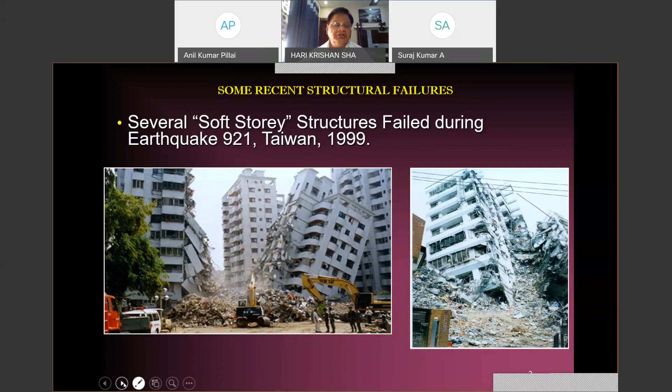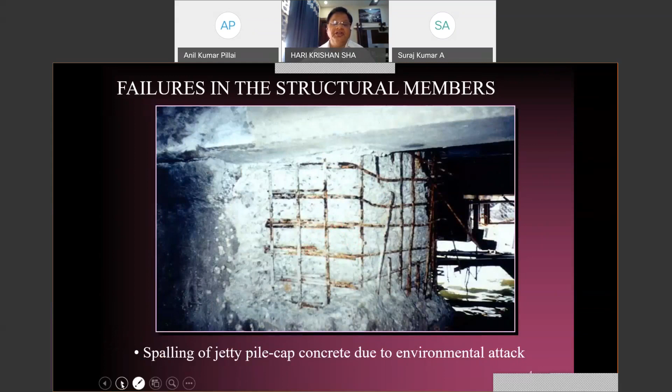You can also see the failure of structural members in this picture, the spalling of jetty pile cap concrete due to environmental effects. Our concrete is prone to environmental effects also, and you can see the yellowish material, which is basically considered as the blood of concrete, which has come out. The concrete cover failed, and you can see that the reinforcement is clearly visible. This was basically a bridge.

You can see that our concrete structures are prone to environmental effects also. On the left-hand side, you can see that the reinforcement is badly corroded. On the right-hand side also, you will find a pier that was corroded, where there is peeling of concrete, and the reinforcement is clearly visible, badly corroded.

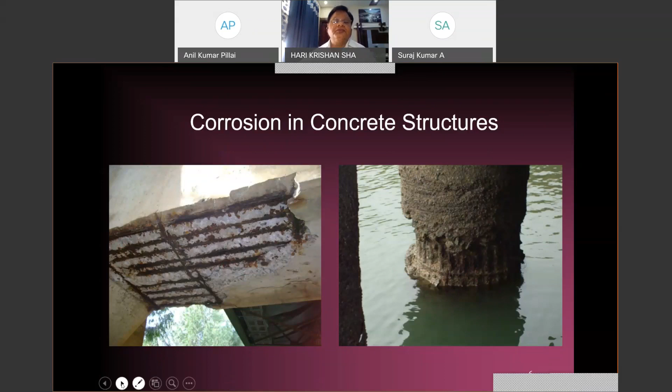Likewise, if you look at the distressed concrete structures which failed during the last 25 or 30 years, you will find that concrete has been badly affected because of one reason or another.

This has basically necessitated the retrofitting or repair of concrete structures. Common conventional techniques for strengthening reinforced concrete elements, like concrete jacketing, shotcreting, guniting, or steel plate bonding, are basically conventional methods which are quite cumbersome, messy, and time consuming. They are also labor intensive and require a lot of skilled work, and now there is a problem of skilled labor too.

In recent years, during the last 25 to 30 years, the construction industry has seen increased demand in retrofitting and strengthening of existing structures because of poor workmanship, poor design, and poor use of these structures. Poor maintenance of the structure is also responsible for retrofitting and strengthening from time to time. This may be attributed to various reasons, which are well known, like environmental degradation, design inadequacies, poor construction practices, lack of regular maintenance, increase in loads, unexpected loading conditions, and so on.

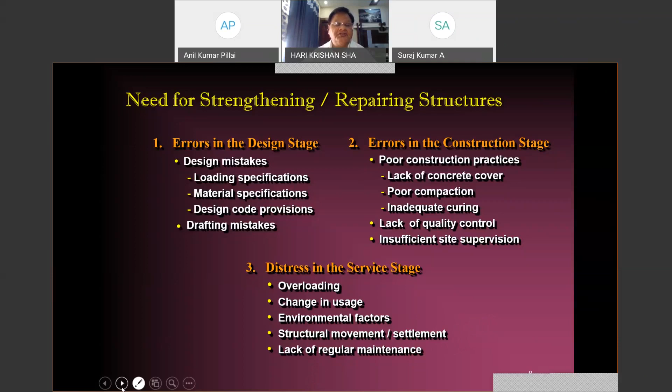Now, with these three parameters which necessitate the strengthening and repairing of structures, let us come to the retrofitting of structures using conventional methods or advanced methods.

As far as the basic objectives of repair or retrofitting of structures are concerned, the basic objective of any technology, especially technology used to repair or retrofit a structure, is to restore a defective structure back to its original state. That is the sole motto.

Further, many times it is our objective to upgrade an existing structure, because many times when we change the use of the structure, it necessitates upgradation of the structure, for which strengthening is required, and to improve or strengthen the existing structural members.

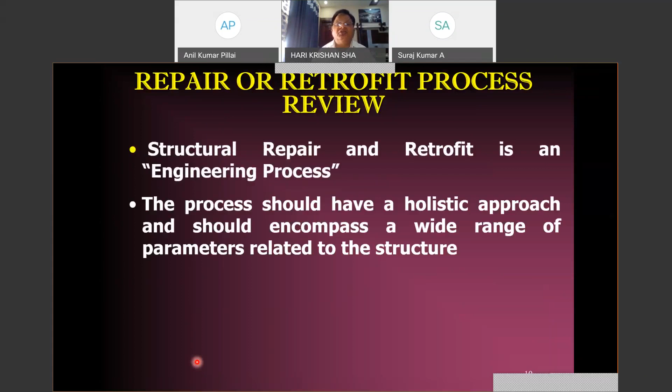Friends, as far as the repair or retrofitting process is concerned, if you look at it, you will find that structural repair and retrofit is an engineering process. It is not a layman process, it is basically an engineering process. I can say that retrofitting is basically an art as well as a science.

The combination of these two will lead to the engineering process methodology, and the process should have a holistic approach and should encompass a wide range of parameters related to the structure. We should see the problem holistically, in totality, and the repair process should appropriately address not only the symptoms but also the causes of the distress.

This is very important, that whenever we go for any kind of technology, we should see the problem in totality. What are the symptoms in the structure? What are the causes of the distress in the structure, and how these distressed structures can be retrofitted?

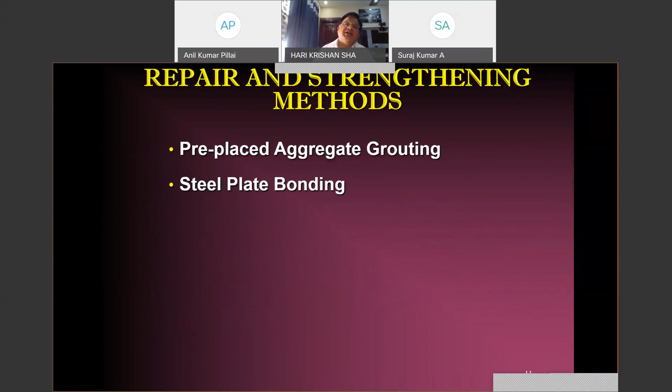Now, as far as the methods are concerned, the conventional methods for the retrofitting of structures, all of us are well conversant with. These are pre-placed aggregate grouting, steel plate bonding, sprayed concrete, crack injection technique, and the latest or recent technology in this area is composite wrapping. As far as pre-placed aggregate grouting is concerned, it is basically nothing but the jacketing of the distressed structure.

The steel plate bonding technology is known to us, and out of these methods, which method is to be adopted will depend on the factors affecting the structure and the degree of severity. One of the most important parameters for the selection of the method is the structural demand or the degree of deterioration.

Now, this will basically decide the method to be adopted, whether we can go for the conventional method or some advanced method. So what is the structural demand? What is the damage in the structure? So that we can retrofit the structure to get back to its original state, or we can even enhance the structural strength for additional loads and stresses which may come because of change of use of the building.

The availability of the budget is equally important, because when we go for the retrofitting of structures, how much budget is allocated for this purpose, and based on that only we can decide that a particular method is suitable.

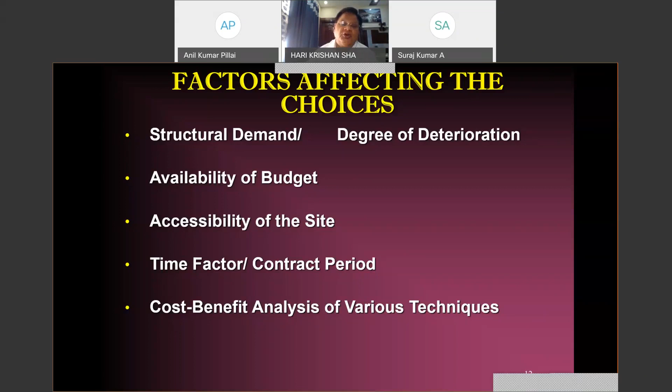As far as traditional methods are concerned, in jacketing we are increasing the size of the member by putting additional concrete and additional steel reinforcement. Now there are many problems associated with this method, like the method is bulky and setup requiring formwork. The method is time consuming and labor intensive.

Nowadays it is very difficult to get skilled labor. The method is fairly destructive because the structure which has already been distressed or damaged, we are basically disturbing that specimen by removing the damaged concrete and the damaged reinforcement. So we are further destructing the structure which has already distressed.

Then improper bond between new and existing concrete is also one of the problems, because the concrete which was laid 25 or 50 years back may not be compatible with the new concrete. Many times the concrete which has already hardened is not accepting the new concrete. So we have to use appropriate bonding material so that there will be a bond between the existing and new concrete. This is also one of the drawbacks of this method.

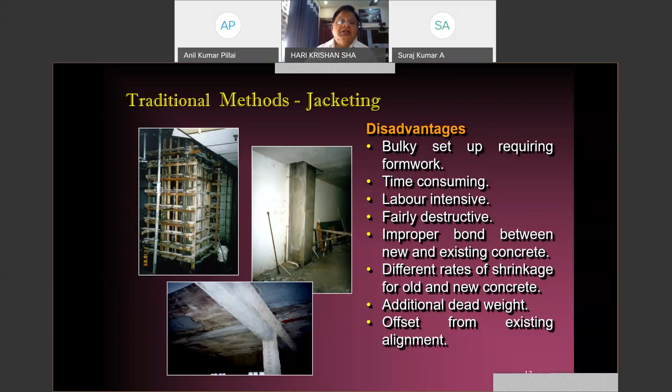As far as steel plate bonding is concerned, the steel plate is basically fixed by providing additional holes in the distressed structure, and we are again damaging or destructing the structure which is already distressed. So these are some of the problems associated with the steel plate bonding technology.

The method requires a bulky setup because the steel plates are very heavy. The method is labor intensive. The steel plates need to be tailor-made, with perfect leveling, and when you put the steel plate over the structure there should be proper contact between the steel plate and the existing concrete. Then it is hard to lift the steel plates and align them with the structure.

Drilling and bolting causes distress in the existing structure. The welding of the steel plates with the existing structure is also a new kind of problem. And there is a problem of quality assurance, because many times such treatment is given by unqualified engineers or by a contractor who is not qualified or competent in retrofitting technology.

With sprayed concrete, again we have some problems, and I'm not going into the details since they are more or less the same. The method is messy, and you will find uneven surface finishing at a later stage. Most importantly, there will be an increase in member dimensions. Say the concrete column was basically 300 mm by 450 mm; after the sprayed concrete, you will find the member has increased by about 50 mm on both sides. That is the problem—it means you are putting additional dead loads, which is again a problem.

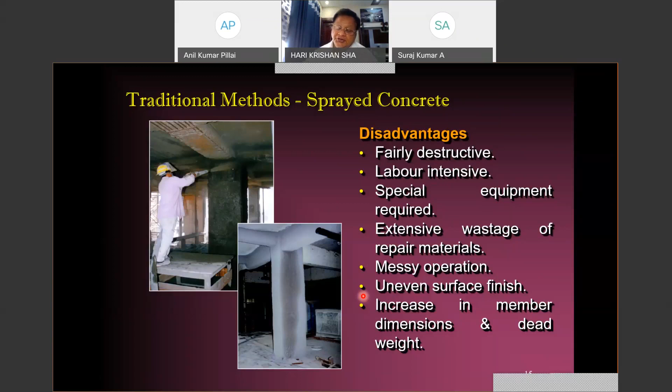Now, as far as the crack injection technology is concerned, this method I would not like to recommend. This is simply a cosmetic treatment, in the sense that cracks in concrete are sealed or injected with epoxy resin, cement grout, or other suitable materials to prevent ingress of atmospheric gases or to restore structural integrity of the element by bonding only. So it cannot be used for repair, and it has nothing to do with the enhancement of structural strength.

So it does not enhance the element's original load carrying capacity. I can say this crack injection technique is simply a cosmetic technique, and it will not significantly increase the load carrying capacity of the distressed structure.

With these conventional methods having such problems, some new or advanced retrofitting methods came into existence. One of the technologies was steel fiber reinforced concrete, developed in the early 70s. As a structural engineer you know it is nothing but concrete prepared by mixing small discrete, small size wires in concrete, and the maximum amount of these steel fibers which can be added in SFRC is 2%. At 2%, there will not be a significant increase in load carrying capacity, whether in compression, tension, flexure, or shear. So this kind of concrete, developed for conventional structures as well as for repair and retrofitting of distressed structures, did not work for a long time because the strength enhancement was not significant.

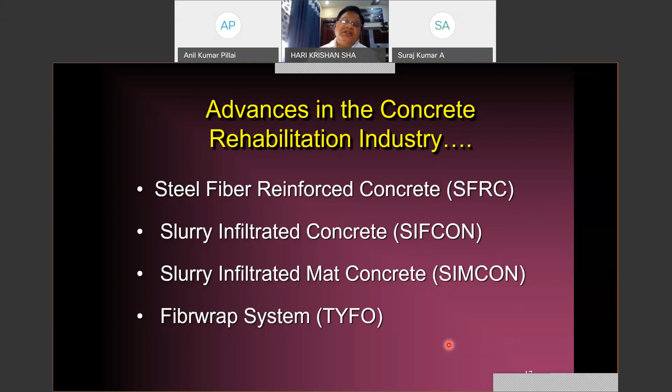Then came into existence the fiber wrapping system. And this fiber wrapping system, using fiber reinforced polymer, is the current basis for the retrofitting of distressed structures.

As far as composite wrapping is concerned, friends, the elements requiring capacity enhancement are jacketed or wrapped with fiber reinforced polymer. So by virtue of concrete confinement, or by acting as additional reinforcement, the load carrying capacity is enhanced. It is a very simple method, wherein the distressed structure is wrapped from all around, and by virtue of the concrete confinement, there will be confinement of concrete, and because of this confinement, the load carrying capacity will be enhanced.

The capacity enhancement depends on the orientation of the fiber and the thickness of the composite material. So the orientation of the fibers and the thickness of the composite material are very important parameters in this technology, so that the strength enhancement can be worked out depending on the structural demand of the element.

Now the question came, why should we go for FRP composites? As far as FRP composites are concerned, they have almost all the advantages of steel plates for plate bonding. The method is speedy and can be applied with minimum increase in structural weight and size. In this method you will find a high strength to weight ratio. Fiber wrapping system is very thin, and you will find significant increase in strength, with high strength to weight ratio when this technology is applied.

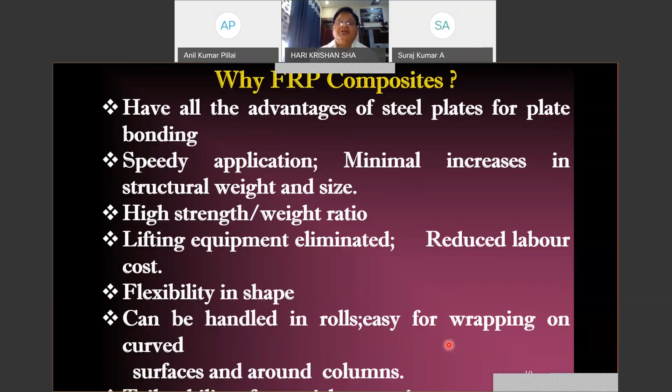Lifting equipment is not required, and the method is also not labor intensive, because only a few laborers are required to wrap the distressed structure using this material. There is flexibility in shape, so any kind of structure can be retrofitted by FRP. The method can be handled in rolls, easy for wrapping on curved surfaces. With these advantages, FRP composites are found better in comparison to the conventional method.

There are again various advantages, as I talked about. The method is fast, intuitive, and no heavy equipment is required. It will mitigate several disadvantages posed by concrete jacketing or steel plate bonding, and no additional dead load is put over the distressed structure.

There are some limitations. Nowadays, there is only one limitation, that the method is a little bit costly. But if you avoid this parameter, because nowadays the thing is costly, the technology has already been developed, and it is basically a waste material from the aerospace industry. So presently, the method is also not costly. And if you see the cost versus time parameter, the technology is very much economical with respect to time. As far as the fiber wrapping system is concerned, the method was developed

around the 80s by a company called Fyfe Company in USA, and it is basically an innovative method to strengthen structures. The materials were basically derived from the aerospace industry, and as I was talking about, this is basically a waste product of the aerospace industry. We are using high-strength glass hybrid systems consisting of E-glass fibers, Kevlar fibers, carbon fibers, and these fibers are basically embedded in epoxy matrix onto the structure. And nowadays, this method is accepted worldwide.

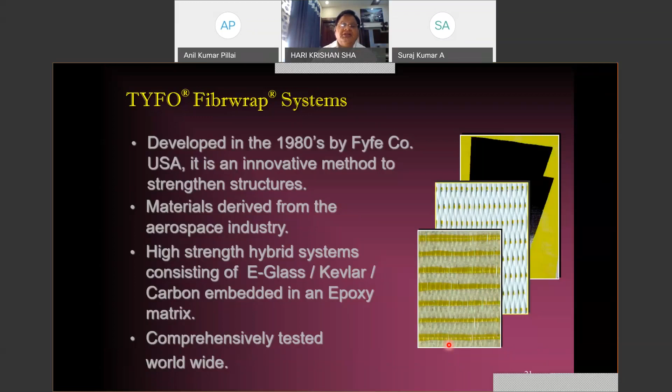As far as the history of this FRP system is concerned, carbon fiber reinforced polymers were first used for the manufacturing of aeroplanes, and the Boeing 787 plane was delivered to All Nippon Airways on 25th of September 2011 using this material. The first commercial flight started for this aeroplane on 26th of October 2011. Each plane used 32 tons of carbon fiber reinforced polymers, including 23 tons of carbon fiber.

So you can say that a huge amount of this material was used in the manufacturing of the Boeing 787 planes. The CFRP composites constitute 50% of the weight of the plane and 80% of the volume of the material. The plane consumed 20% less fuel due to the use of carbon fiber reinforced polymer. So you can see the economy in fuel consumption because of the less dead load of the plane.

As far as carbon fiber reinforced concrete structures are concerned, this material was also used for high-speed intercity buses. You can find the frame of the high-speed intercity bus, which was basically made up of the FRP, the carbon fiber reinforced polymers.

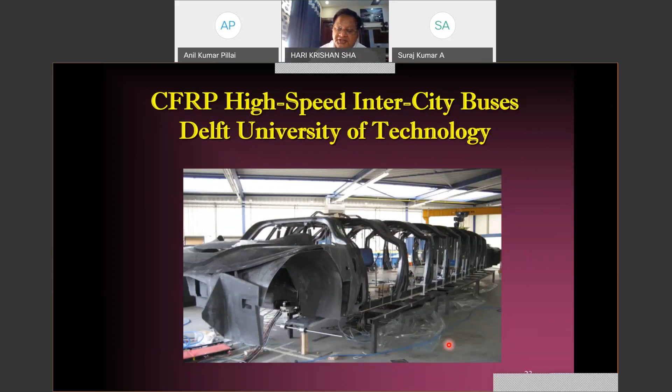This is basically one of the bridges, the Storchen Bridge, which was constructed in Switzerland, and this bridge was built around 1996. There were two spans, one span having a length of 63 meters, the other one 61 meters.

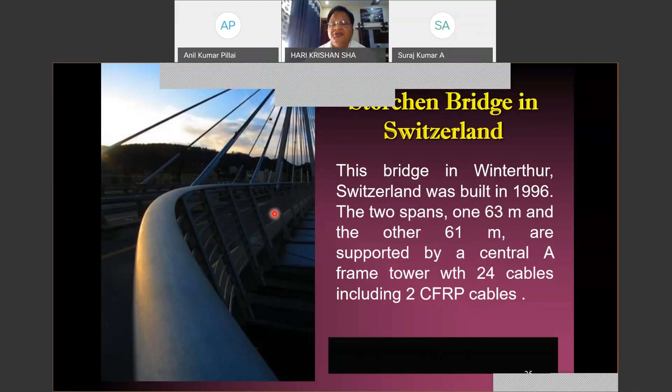They are supported by a central A-frame tower. You can see the tower. This is basically an A-frame tower over which this bridge was supported with 24 cables. And out of these 24 cables, two carbon fiber reinforced cables were also used in this bridge.

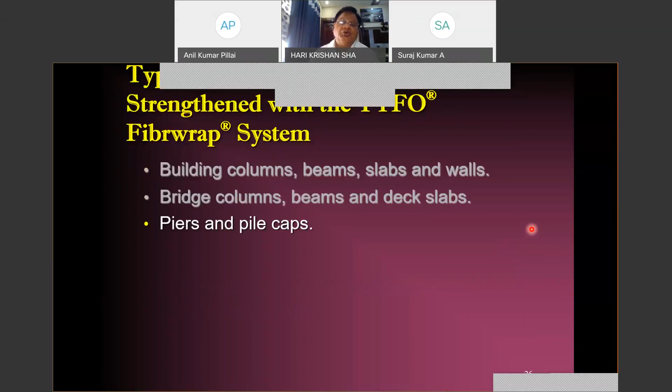So as far as this material is concerned, if you see the application of this material, it can be used for retrofitting or strengthening of building columns, beams, slabs, and walls. It can be used for the construction of slabs also, in piers, the longitudinal and cross girders in case of bridges, in pile caps, in tunnels, and in large and small diameter piping also.

For steel pipes also, this method can be used for strengthening purposes. And for wooden and concrete piles, this method can also be used advantageously. In case of marine structures, you will find in some of the slides that this material was also used for jetties and similar works to strengthen these structures.

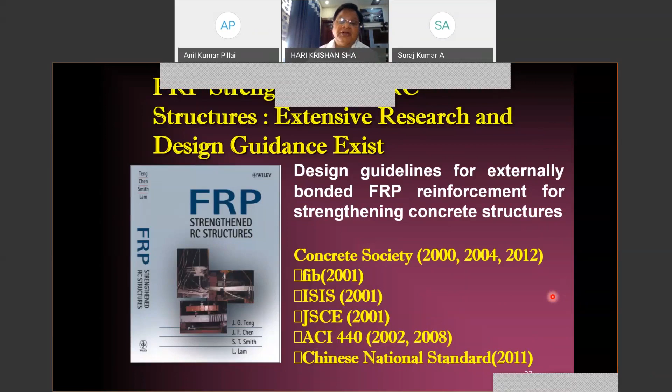As far as research and development in the area of fiber reinforcement is concerned, there are some books available in the market, and you will find a book on fiber reinforced polymer strengthened reinforced concrete structures. This book basically gives design guidelines for externally bonded FRP reinforcement for strengthening concrete structures. In addition to this book, you will find a number of research papers and the ACI code 440, which was developed in 2002 and reaffirmed in 2008. This code is widely used for the design of FRP structures.

As far as the advantages of this method are concerned, as I told you, the method is non-destructive and easy to install, because in this case, you are not destructing the structure which has already been distressed. The material is very light and will be of only a few kg in weight, and will not require heavy or special equipment. It can be used in space-constrained areas because not much space is required, can incorporate different finishing coats, and can be used in underwater structures also. So in case of piers, in case of foundations which are constructed underwater, this material can be used advantageously.

As far as the performance characteristics of this material are concerned, when we design our structure, there are two considerations: one is the strength consideration, the other is the serviceability criteria. As far as strength is concerned, in limit state design you have the limit state of collapse.

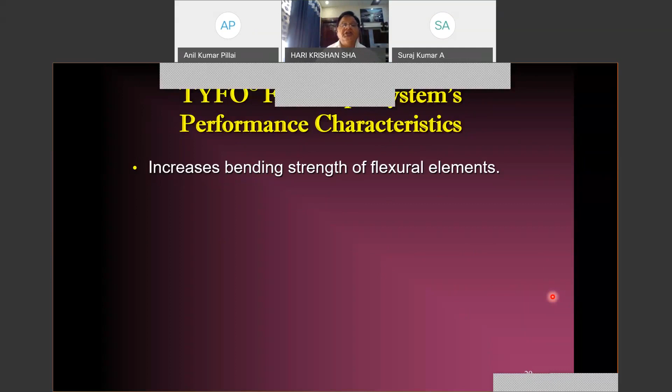And for serviceability, you have the limit state of serviceability. So following the limit state method, using this material you can enhance the flexural strength of members, increase the shear strength of columns and walls, and increase the vertical load carrying capacity of compression members. The material is also used to increase the ductility of the structure, which is of paramount importance in earthquake resistant structures, and under cyclic loading any increase in ductility is an added advantage.

The material has very high tensile strength, and it does not corrode, which helps contain further corrosion of a distressed structure. Because it is waterproof, it will not permit the ingress or penetration of water into the structure, further containing corrosion.

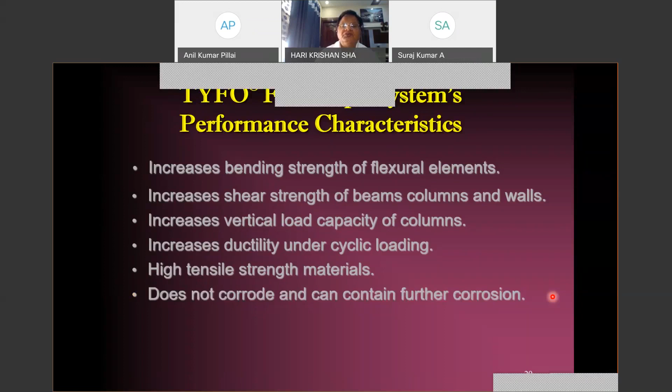As far as application of this material is concerned, nowadays you will find FRP bars which have replaced conventional steel bars.

You will find this material used for compression members also, and it can be used as formwork. We can leave this formwork as such, and the material will basically replace conventional reinforcement.

The material can also be used as a truss member in truss structures - for compression members, tension members, diagonal members, vertical members, and so on.

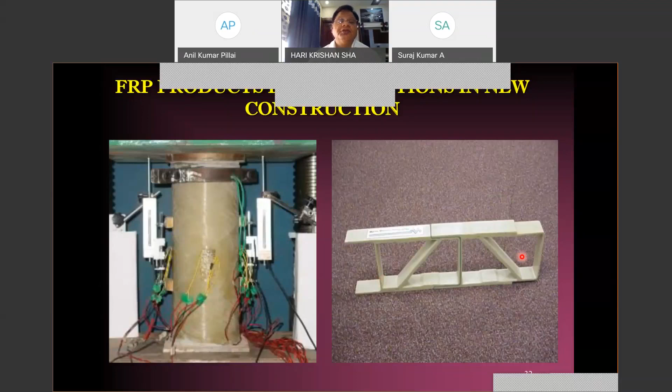As far as application is concerned, this is very interesting - the structure you want to retrofit must first be prepared. As far as surface preparation is concerned, we remove the plaster and clean the surface, patch up surface irregularities, and round off all corners to about 20 millimeters.

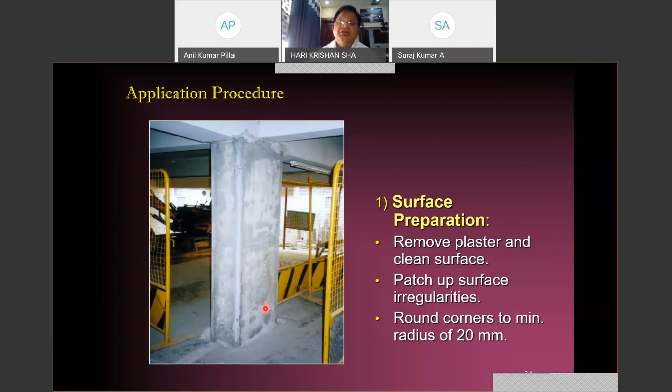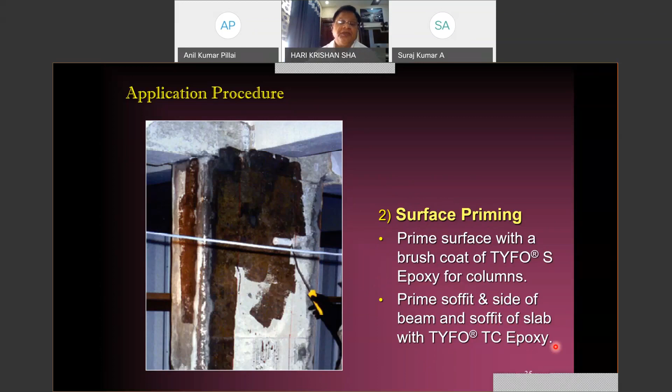These corners are rounded so that when you apply the FRP sheet all over the column, there will not be ingress of atmospheric gases from the corners. Once the surface is prepared, it is painted with a surface priming coating - a brush coat of epoxy - priming the soffits and sides of the beam and slab also with appropriate epoxy.

Once the epoxy is applied and the surface primed, the fiber sheet is wrapped all around the member, like a bandage. The fiber reinforced polymer sheet is available in rolls - you simply unroll the sheet, put a layer of epoxy, and wrap it over the distressed structure, just like a bandage.

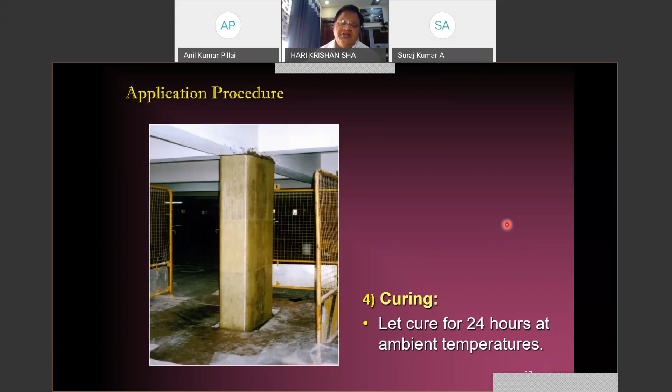Once the distressed structure is wrapped, you leave it for about 24 hours at ambient temperature for curing - no special curing is done. After 24 hours, you can apply any kind of finishing coat and the structure is ready. Now you can see there is a white finishing coat, and the structure is ready for use, for different types of structural components like beams, columns, slabs, and foundations.

In case of retaining walls also, this material was advantageously used to enhance structural strength. Now you can see the application of this material for retrofitting beams, where it was applied on the bottom as well as on the two sides of the beam.

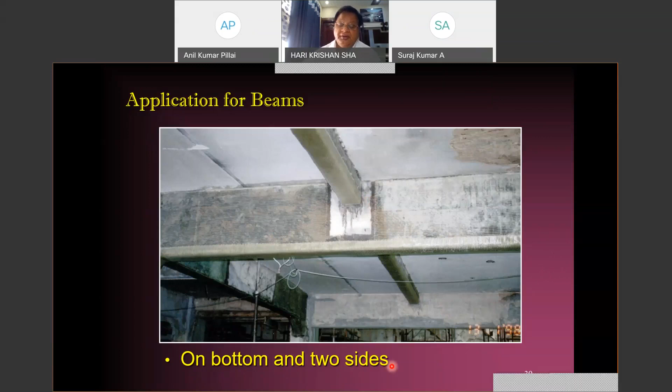You can apply this material over the walls, just like a wallpaper. You can put a sheet of the material over the wall and fix it with an appropriate epoxy, so it will look just like wallpaper.

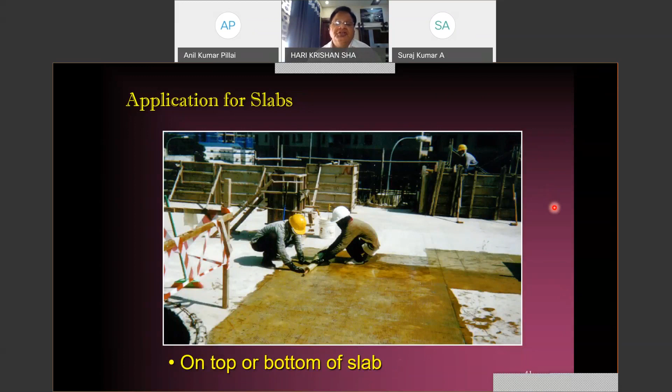You can apply this material for retrofitting of slabs, either from the top or from the bottom, depending on the type of cracks developed in the structure. You can use this material either at the top or bottom of the slab.

The material can be used advantageously for the retrofitting of columns, silos, and chimneys. For a column, you can simply put your FRP sheet all around it, just like a bandage.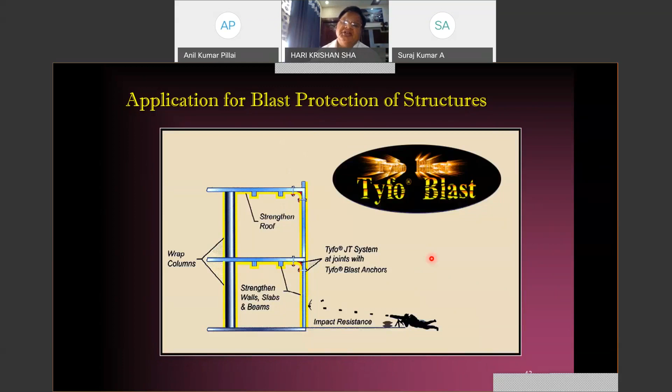This material is basically blast resistant, so it can be used advantageously in bunkers and silos, which are normally used by our defense people. This material can withstand a blast of significant intensity.

As far as the code of practice for the material is concerned, we do not have any standard code. There are some guidelines from ACI Committee 440 and ICBO. AC 125 is also available. ICBO is the International Conference of Building Officials, with specifications for concrete and unreinforced masonry strengthening using fiber reinforced polymer materials. Using this ICBO AC 125 code, we can design FRP structures for the loads and stresses that will come over the distressed structure in future.

ACI Committee 440 provides guidelines for the design and construction of externally bonded FRP systems for strengthening concrete structures. It states that FRP systems must be developed through material characterization and structural testing, as untested combinations of fibers and resins could yield an unexpected range of properties as well as potential material incompatibility.

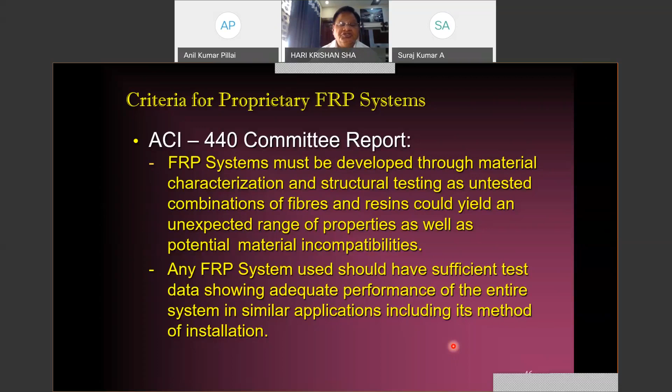These are some of the physical properties of the composites which are required to be tested before applying this material onto the structure, like ultimate tensile strength, elongation, tensile modulus, coefficient of thermal expansion, etc. All these properties are tested as per ASTM standards.

As far as the durability aspect is concerned, these are some of the tests—water resistance test, salt water resistance test, alkali resistance, and dry heat resistance test—which are conducted to ensure the durability requirement of this material. These tests are also conducted as per ASTM standards to know the applicability of the material.

As far as ICBO requirements are concerned, system tests are to be conducted when this material is used for columns, beams, slabs, or infill walls. These tests are conducted in compression, shear, flexure, and some tests are also required for ductility. When this material is used for beams, flexural and shear tests are obviously required.

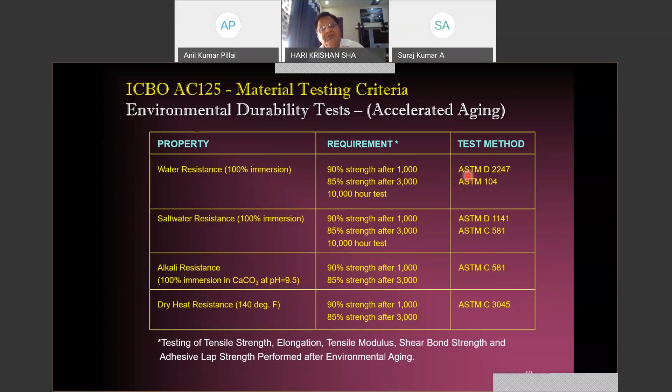In case of slabs, which are basically flexural members, flexural test will be sufficient. In case of walls, out-of-plane flexural and in-plane shear tests are required. And when the material is used for pipes, the pressure test is required to be conducted.

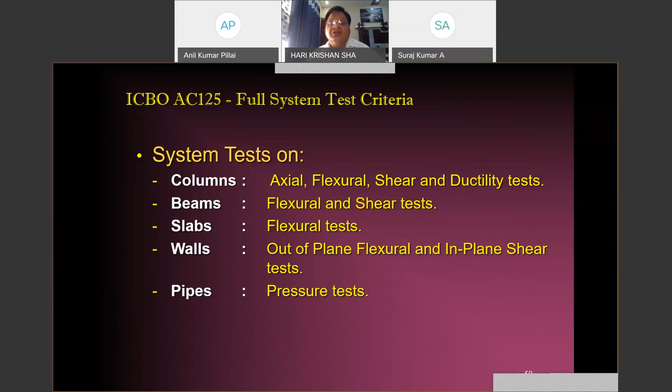This material was widely tested at the National University of Singapore. Columns, beams, and slab elements were extracted from an existing structure, and these elements were strengthened with Tyfo and tested to failure.

The actual failure loads were compared with the theoretical design capacities, and it was found that there was a significant increase in the load carrying capacity under different loading conditions.

When these elements were extracted from the real structure, they were basically wrapped for testing in shear, in flexure, and in compression.

You will find a control beam which was basically tested. The design ultimate load was of the order of 268 kilonewton, whereas the beam failed at a load of 326 kilonewton.

The same beam was then strengthened with one layer of U-shaped shear wrapping with fiber anchors at 200 mm center to center.

The design ultimate load was increased to 370 kilonewton because now the steel fiber, the FRP, will also take some load. So this was increased to 370.

When this beam was tested, the failure load was increased to 445. So you can see that there was a significant increase from 326 kilonewton to about 450 kilonewton, with an increase in actual shear strength of the order of 37.

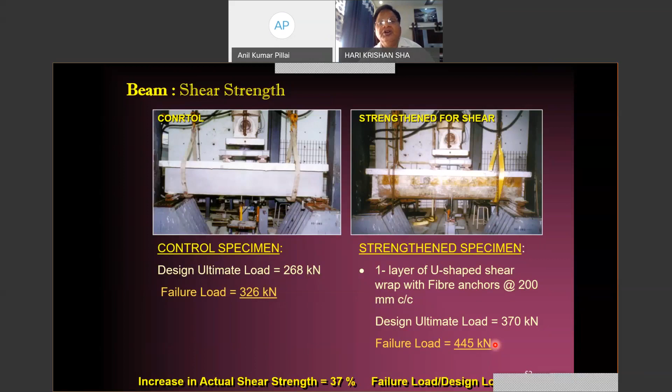So there was an increase in ductility factor by a magnitude of more than 3 times. It means the material is significantly ductile and will increase the ductility of the structure when applied over the distressed structure.

This material was tested in various universities and research centers, and primarily this material was developed in the USA.

A number of universities like Colorado University, West Virginia University, University of Bologna, and University of California tested this material for its application in civil engineering structures.

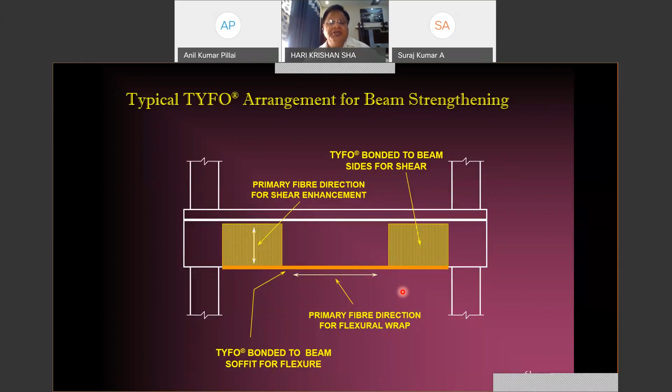This picture gives a clear idea about T-beams. You can wrap these beams all around, and then at the ends put fiber anchors. These anchors are also made up of FRP, and they are put so that the sheet does not come out at the ends at a later stage. This is simply like providing additional development length. These are some of the anchors.

As far as the analytical aspects are concerned, the flexural capacity of FRP strengthened slabs has been investigated by many investigators, and they have provided design guidelines to calculate the flexural strength of slabs and beams. Slabs are also flexural members just like beams, and we analyze these slabs like beams only.

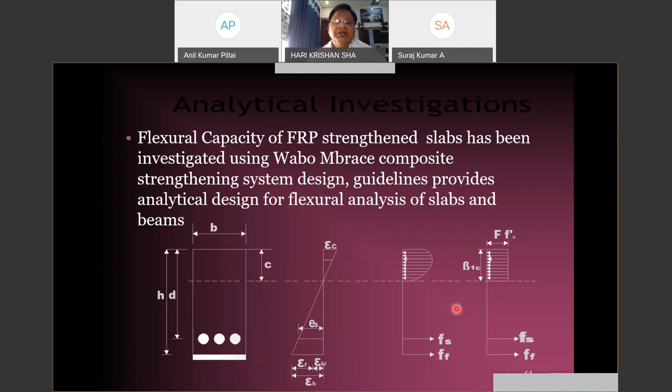In case of a beam with conventional reinforcement that has failed, when it is retrofitted using an FRP plate at the bottom or on the sides, you can draw the strain diagram and stress diagram, and using these stress-strain diagrams along with compatibility equations, you can calculate the load carrying capacity or moment carrying capacity of the member. These are some expressions which may be used to work out the moment carrying capacity of members using FRP composite.

As far as installation of this material is concerned, initially it was used in the USA, then it came to Singapore, where researchers from Nanyang Technological University and the National University of Singapore started research and development work on this material. In India, this material came from Singapore through their agencies.

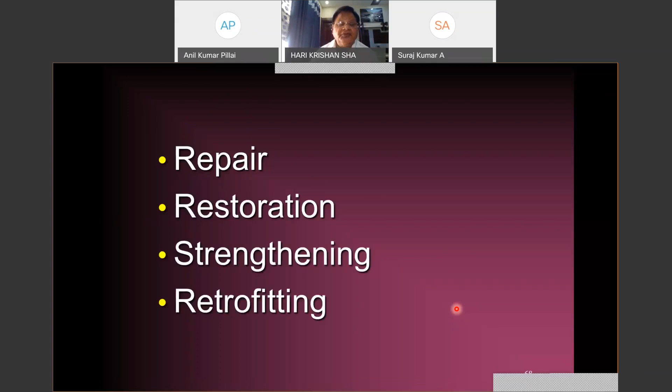As far as application of this material onto structures is concerned, in civil engineering there are basically four terms as far as the repair and retrofitting area is concerned: repair, restoration, strengthening, and retrofitting. These are four terms which are many times used vaguely in civil engineering.

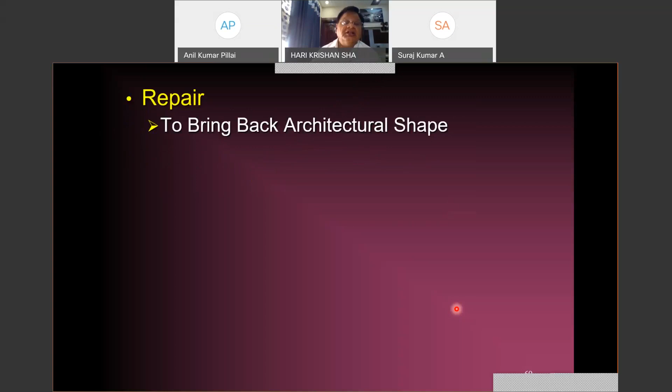Repair is basically the technique used to bring back the architectural shape of the structure. It has nothing to do with strength enhancement; it is simply a cosmetic treatment. Then comes restoration, which is to restore the original strength of the structure. The capacity of the structure will not be enhanced; it will come back to its original strength. This procedure is regarded as restoration.

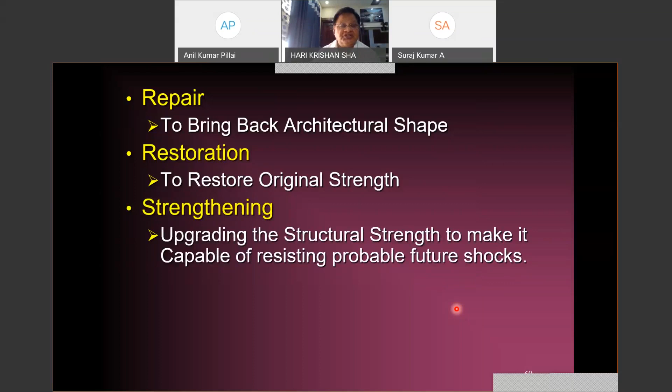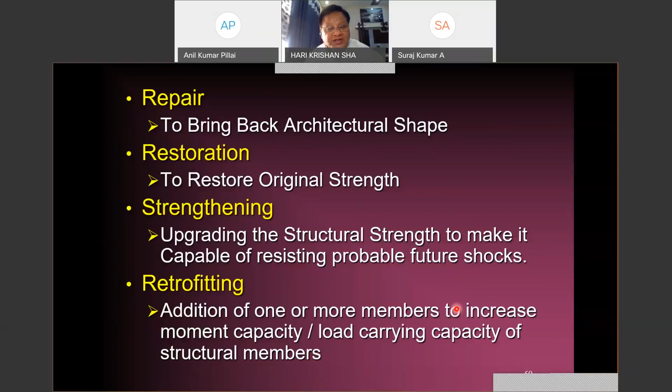Then comes strengthening, wherein there is upgradation of the structural strength to make it capable of resisting probable future shocks. When there is a change in use of any structure, we should go for strengthening. Lastly comes retrofitting, which is the addition of one or more members to increase the moment capacity or load carrying capacity of the structural members. With these four terms, we should use them very precisely when going for strengthening, restoration, or retrofitting.

As far as the application part is concerned, this is one of the HDB buildings, which was basically used as car parking in Singapore, and the building was upgraded using this material. The building was found deficient because of increase in loading, as two more stories were added at a later stage.

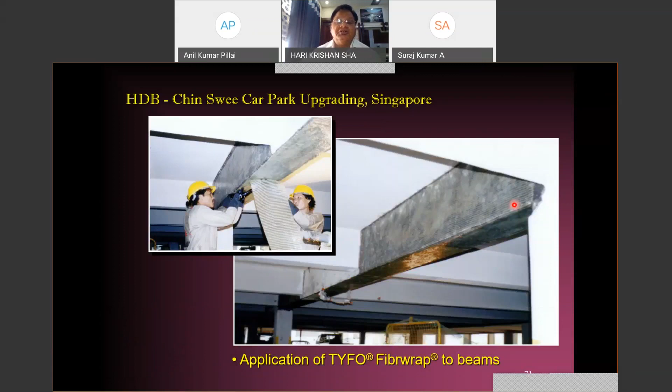When structural engineers checked during the structural audit of the building, it was found deficient because of the addition of two stories. So this building was retrofitted using FRP technology. You will find the application of this material over the beams as well as over the columns for the same building.

You can see that this technology was used for retrofitting of the slabs, from the top as well as from the bottom. You can see that this material can be used in strips. It is not necessary that you put this material over the entire surface. Depending on the structural demand, you can put strips over the structure if full covering is not required. That is to be decided based on a detailed engineering survey using appropriate non-destructive testing technology.

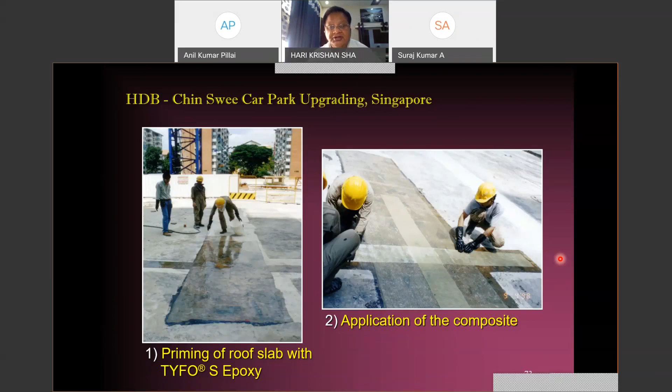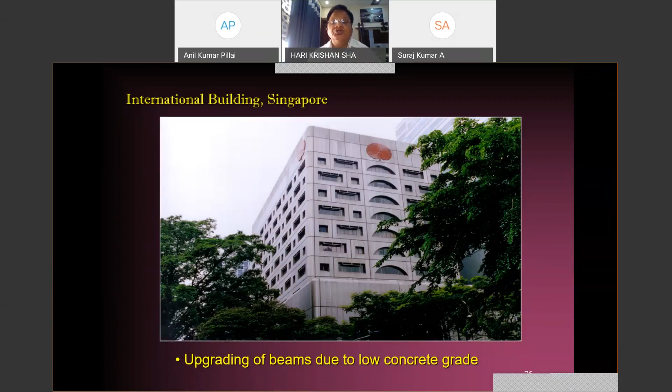This is basically an international building in Singapore which was upgraded, and it was found that a low concrete grade was used during manufacturing. So when the structural audit was conducted, it was found that the building needs retrofitting of most of the structural elements. Then the building was retrofitted using appropriate technology. You can find some of the elements which were found corroded, and the reinforcement was visible.

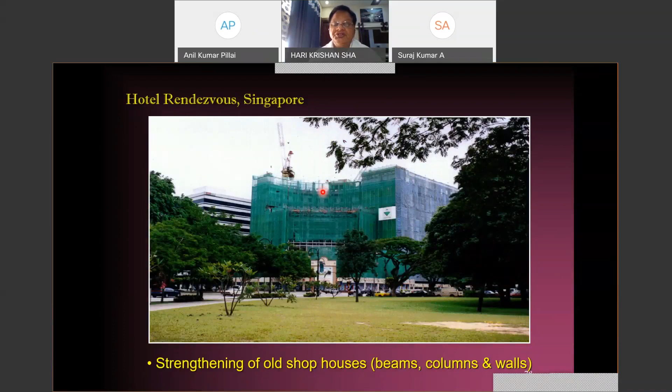This is very important because the strength enhancement will basically depend on it. I am again emphasizing this point that the orientation of the fibers is very important in order to achieve appropriate strength enhancement. So the strengthening of walls was done, and you can find the completed structure in a very beautiful shape.

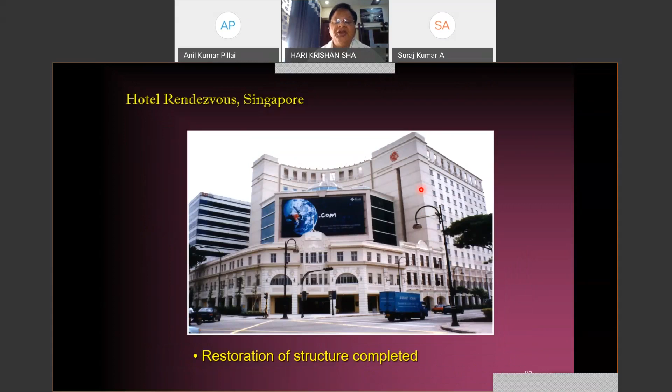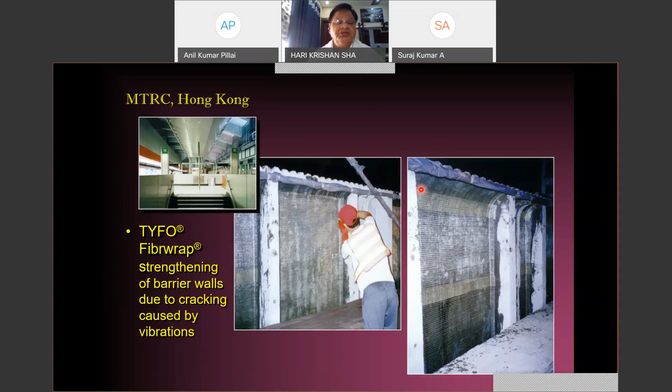This is basically one building, the MTRC building in Hong Kong, which was basically retrofitted using this technique. The building was found deficient because of cracking caused by vibrations. Machinery was basically installed in this building, and because of a lot of vibrations, there were severe cracks in the building. So using this technology, this building was retrofitted.

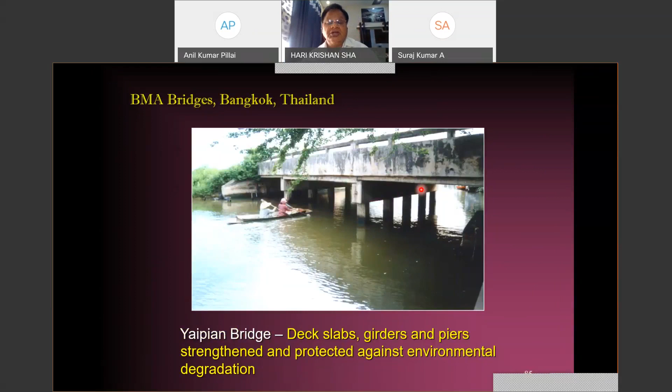This is the bridge in Bangkok, Thailand, wherein you will find that a number of structural components were found deficient. You can see that in this girder, the reinforcement is exposed because of severe dampness in this area. The concrete cover came out, and there was severe corrosion in the reinforcing bars. So because of this corrosion in the reinforcement due to saline environment, these components were retrofitted.

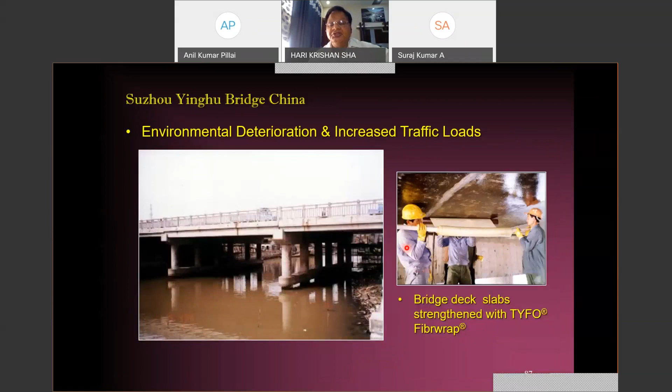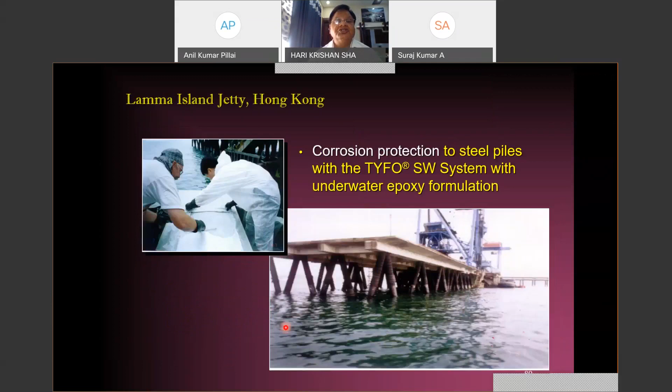Again, these are some of the structures, jetties in Hong Kong, and we can use this kind of material for wooden piles, for steel piles, and for other structures also. The seismic strengthening of structures and corrosion protection of structures can also be achieved using this technique.

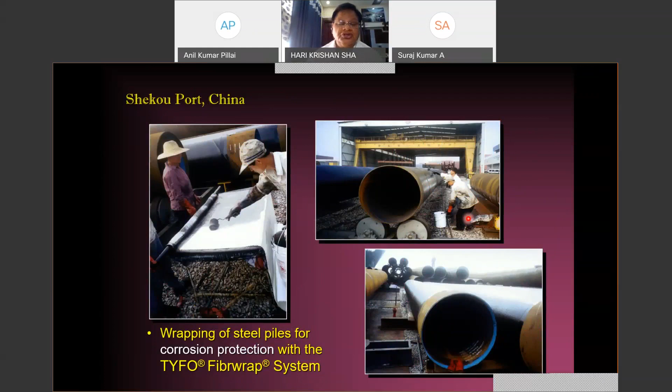You will find some blackish material. It was coated all around the steel pipe to check the corrosion of the steel. Again, you will find some pictures of structures which were retrofitted in Malaysia, in Canada, and in USA also.

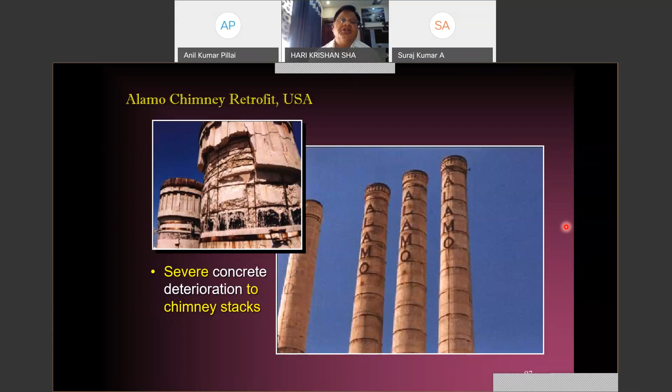This was basically of historical importance for USA, and this chimney was retrofitted using this technique. So once the retrofitting was done, you will find that all the exposed reinforcement was covered using this technique, and the reinforced chimney looked like this.

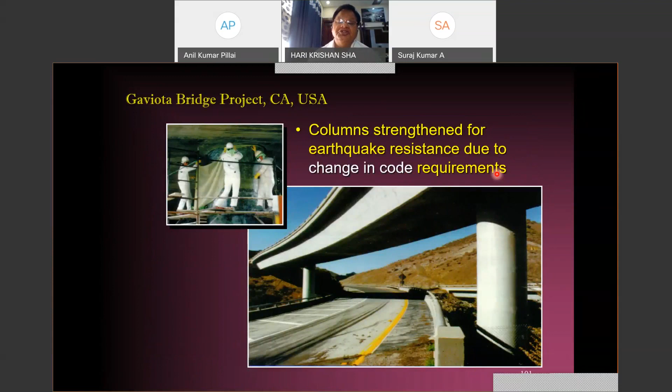This was one of the bridges in USA which was retrofitted using this technique. It was found deficient because of change in codal requirements, so it was retrofitted, and there was no damage found even when an earthquake of 6.6 magnitude came in California at a later stage.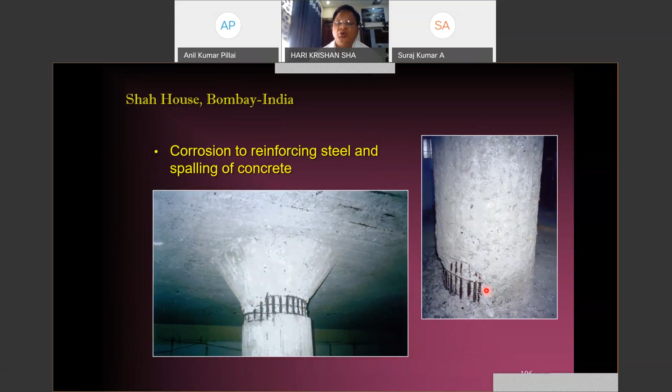In India, we applied this material to retrofit Shah House in Bombay, and the strengthening of flat slab and circular columns was done, which were found deficient because of severe corrosion and low grade of concrete used during construction. You can see the exposed reinforcement over here, and likewise at the junction with the floor, the reinforcement is corroded and exposed. These structural members were retrofitted using this technique successfully.

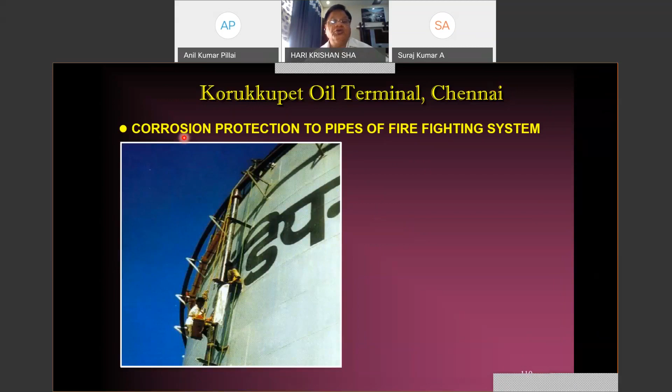This was at Chennai, one of the Indian Oil Corporation storage tanks retrofitted using this technique. The tank was found corroded, and for corrosion protection of pipes of the firefighting system, this system was adopted because the fuel was already there and we cannot go for hot work. We had to use a technique that works under cold environmental conditions, and the technique should also be economical and give a long-lasting solution. This tank was basically retrofitted successfully.

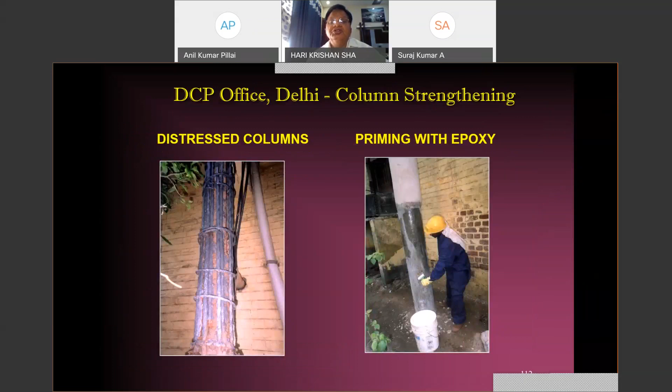You will find some buildings with columns which were retrofitted in Delhi also. The retrofitting of the column can be seen in these pictures.

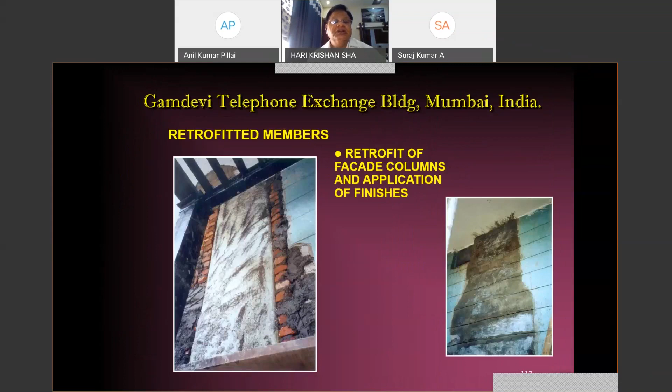For some telephone exchange buildings in Bombay, this technique was also used successfully. A bridge and the telephone exchange in Bombay were also retrofitted. Some quarters were retrofitted, and structural members like beams, columns and slabs which were found severely damaged were retrofitted using this technology successfully in Delhi.

You can find that priming is going on, the wrapping of the columns in progress.

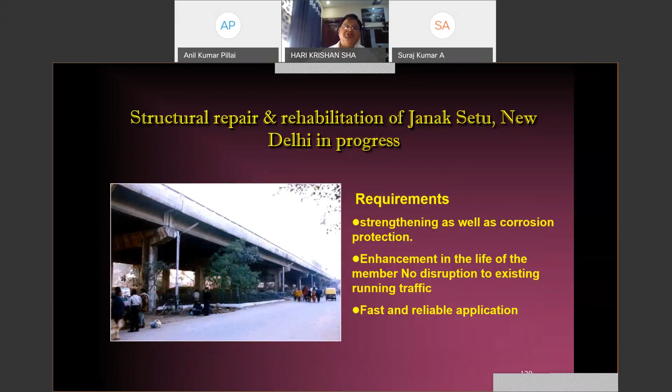This method was also adopted for the structural repair and rehabilitation of Janak Setu in Delhi. This bridge was repaired and retrofitted successfully. You can see the distress in the structural member; at the bottom, the reinforcement is visible, and the longitudinal girder is in a very bad shape. These structures were retrofitted successfully using this technique.

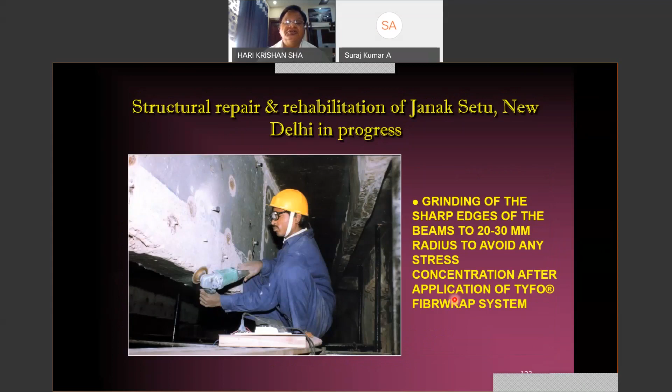You can see the work is going on at this bridge, and this work was basically completed successfully, and the bridge was put to use later on.

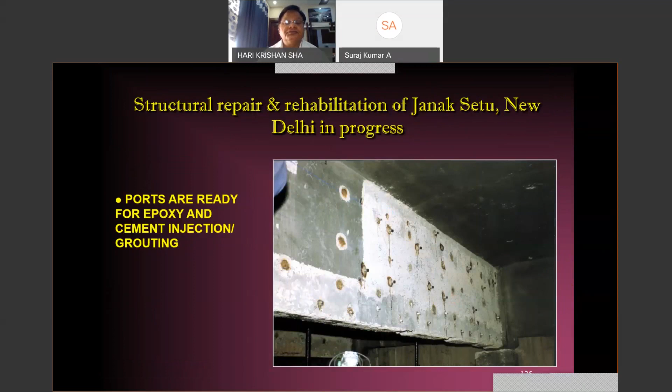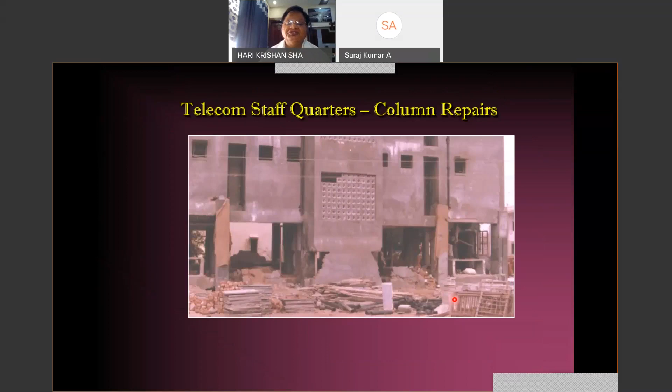As far as seismic strengthening is concerned, although I have shown many slides earlier, these are some slides used for multi-story buildings damaged during earthquakes. This technique was used to increase the flexural capacity, the ductility, and other force parameters for the distressed structures successfully. You can see the cracks in the buildings, columns and walls, and using this technique these structural elements were retrofitted successfully.

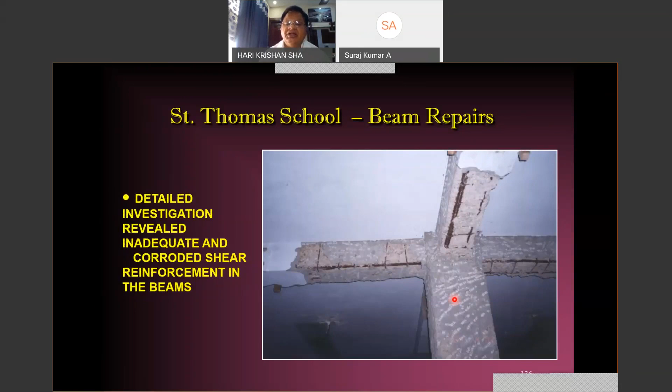All the school buildings were also retrofitted successfully. You can see the slab portion of the building, where there was severe cracking and peeling of concrete from the beams and slabs. The concrete cover came out and the reinforcement was visible in the beams and columns. Using this technique, these structures were also retrofitted successfully and put to use at a later stage.

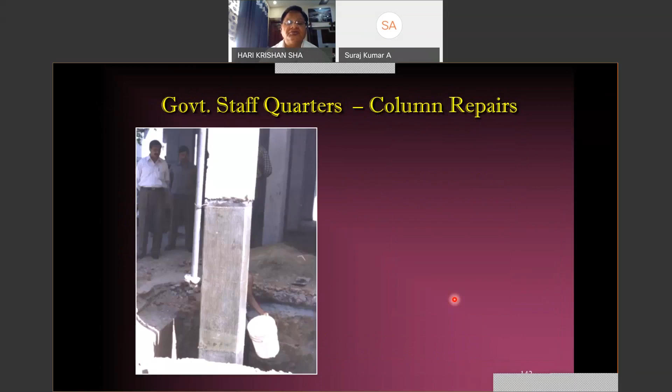You can see the finished surface of the longitudinal and transverse beams after completion of the retrofitting process. You can see some of the staff quarters of a number of buildings which were retrofitted using this technique. This technology was also used for retrofitting of overhead tanks.

In 2015, an overhead tank in Ahmedabad was retrofitted. I was involved as a structural consultant to advise on the appropriate method for retrofitting this tank, providing the methodology, structural design, and procedure. Using this procedure, the tank was retrofitted with FRP technology. After 7 or 8 years, the structure is still working well, and I hope it will continue to work well for another 25 to 30 years. These are some slides showing this tank, which was retrofitted successfully using this technology.

In a broad way, we can say that FRP technology can be used successfully for strengthening or retrofitting of distressed steel or concrete structures. The need for strengthening, repair, and retrofitting must be ensured by conducting a detailed survey of the distressed structure. The repair and retrofitting of structures using composite technology is an appropriate technology, and the methodology basically depends on the type of failure of the structure.

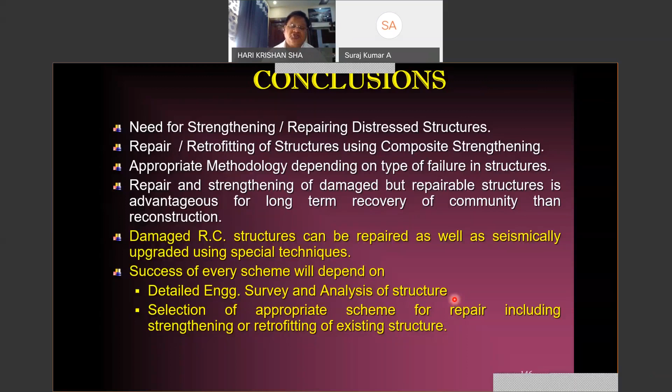This is a very important conclusion: the basic aspect is the detailed engineering survey and analysis of the structure, which must be carried out by a qualified engineer. The selection of the appropriate scheme for repair, including strengthening or retrofitting of the existing structure, is to be decided by the structural engineer. FRP strengthening has been accepted as a mainstream technology all over the world, although the methodology still requires some more research.

We still do not fully know strengthening with pre-stressed FRP reinforcement. This is basically a gray area where a lot of research is required. The performance in severe environmental conditions is again one area which requires further studies.

Because many times, in severe environmental conditions — I have personally seen, when we worked on some beams for retrofitting, that those beams were put under normal temperature in an open area for 2-3 years, I found that there was some debonding of FRP from the surface. This area under severe environment needs to be investigated.

The performance under extreme loading conditions, like blast loading and impact loading, is another area we are working on nowadays. My two PhD scholars are working to investigate the performance of this material under extreme loading conditions.